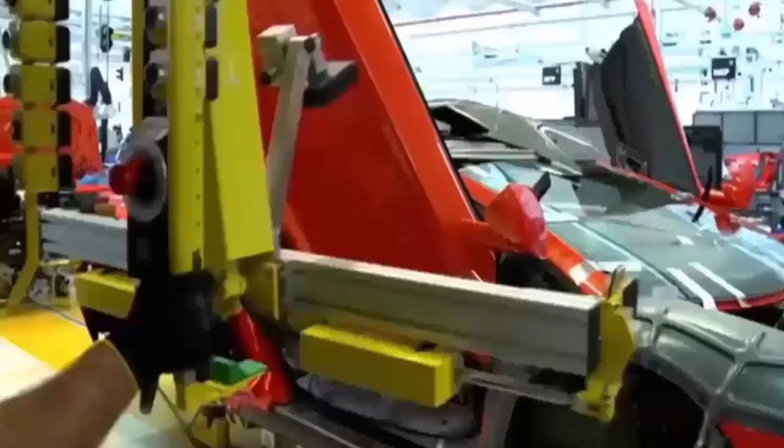But this will be no simple reworking of Lamborghini's old flagship models. Its engineers and designers are given the task of starting with a completely clean slate. And at its mega factory in northern Italy, the Lamborghini team has been stretched to its limits to fulfill those expectations. Now, as its latest creation takes to the road, it will be seen if the high-risk strategy has paid off.

Lamborghini has been responsible for some of the world's most iconic sports cars of the past half-century. 350 GT, Miura, Countach, Diablo. The brand has achieved global recognition for its no-holds-barred approach to automotive engineering. Its extreme and powerful machines have placed it among the supercar manufacturing elite for decades. But there's no room for complacency in this increasingly crowded marketplace. And a decade since the launch of their last flagship model, the Murciélago, it's time for Lamborghini to flex its muscles once again.

It's up to Stephan Winkelmann, the company's CEO, to come up with a bold approach. One of the toughest things was to give the right briefing. And it took us weeks and months. And once I went home and I was thinking about it, it's so easy, and it's just down to 2 words: no competitors. 4 years of intense development follow, conducted in fiercely secretive conditions. Our factory was as closed as Fort Knox. We had to prevent anybody from coming in and taking any picture to avoid leakages.

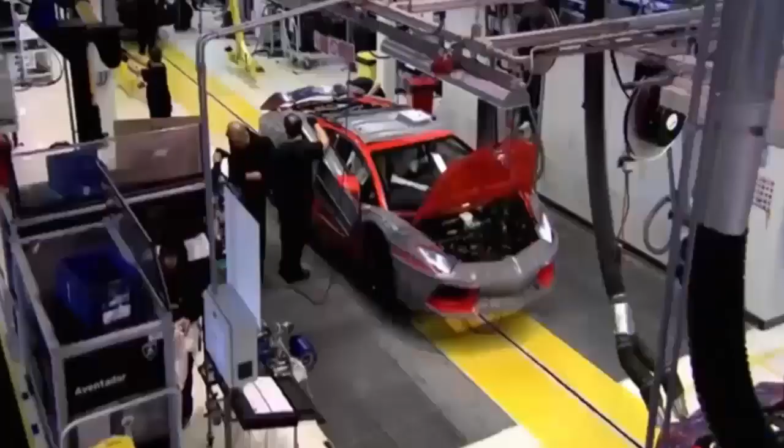This is Sant'Agata Bolognese, a typically picturesque town in the heart of Italy's Emilia-Romagna district. But it is in fact anything but typical, as it's home to Lamborghini, one of the world's most renowned supercar manufacturers. The factory is situated in the heart of what is known as Motor Valley in northern Italy. Sant'Agata is intrinsically linked to Lamborghini's success, according to its head of communications, Raffaello Porro. Everybody in the world recognizes our cars come from Sant'Agata Bolognese. And so our factory is a kind of temple where people come, you can say a pilgrimage, to visit where those cars come from.

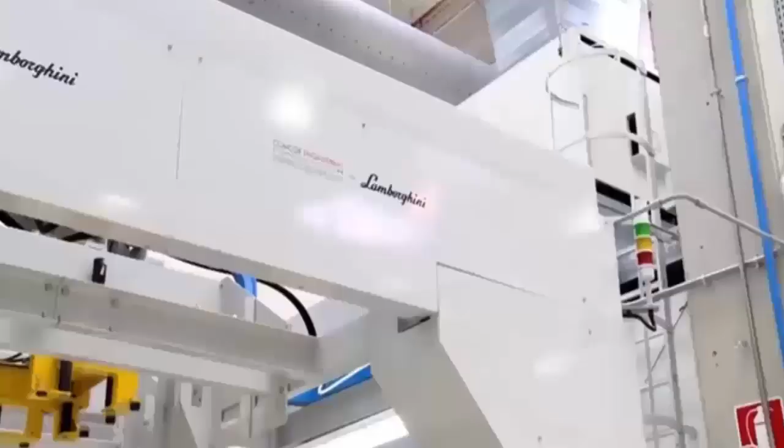The factory has seen many changes over the years, but its purpose has never wavered: to produce vehicles that challenge the status quo. And a largely local workforce is a vital part of that ethos. They're coming from this region, not even from the region, they're coming from this part of Emilia. You know, we are in Emilia-Romagna, it's the Motor Valley, and this is in Emilia. So a lot of our people are not only living here, they were born here, they are here since generations, and a lot of workers we have in our plant are here at the second generation.

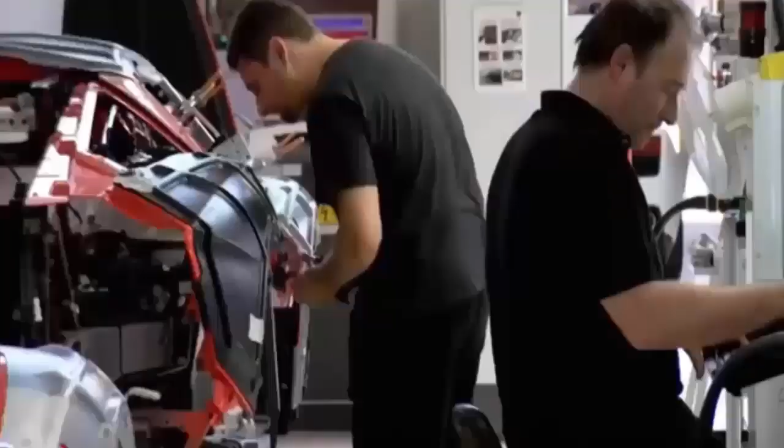These people are Lamborghini's lifeblood. Over 400 individuals working with a singular aim, to produce high-end vehicles that consistently capture the public's imagination. In the last couple of decades, a new breed of creative and high-tech vehicle specialists has emerged. Companies such as Pagani and Koenigsegg have set their sights on toppling the most revered names in supercar engineering. Names like Lamborghini.

But it's unlikely that this Italian giant will let its mantle fall without putting up a fight. An attitude embodied in the company's emblem, the Raging Bull. Partly inspired by the bravery of Spain's legendary fighting bulls, one of which showed such fearlessness in battle that it was awarded a trophy for its courage in 1993. Its name was Aventador, and almost 20 years later, its legacy lives on in Lamborghini's latest model.

It's Aventador's battling spirit that Lamborghini's development team must channel. In 2007, they're faced with the daunting task of creating a supercar that sets the standard for all others. Maurizio Reggiani, head of research and development, realizes that the only way of doing so is to take a step into the unknown.

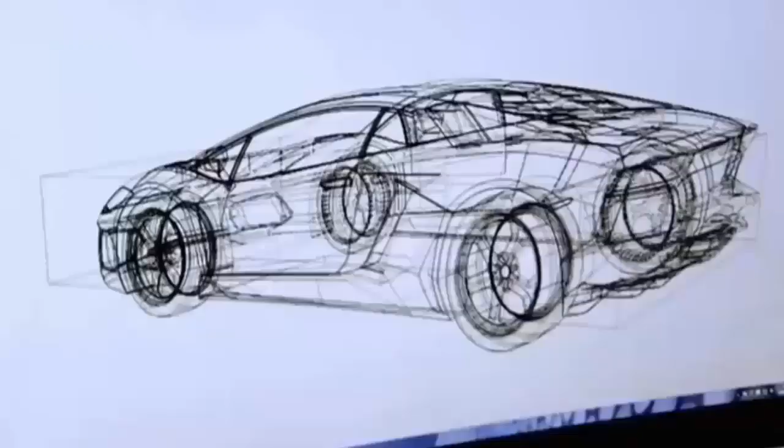We had to completely redefine the car, to start from a blank sheet of paper, and on this sheet determine, for each function, all that was needed to ensure that we'd have the best car in the world, to completely redefine what constitutes a super sports car. To start from a completely clean slate is extremely high risk, and it's up to Reggiani to convince the board that it's the right thing to do.

This was one of the hardest things. Why? Because the project we were presenting had nothing in common with the old Murciélago, not with anything that existed in production at all. So it really meant beginning from scratch, with all the risks that come with that. But the board decides the risk is worth taking. At the end of the day, they understood very well, because this is, again, about what Lamborghini is all about. Now, to recreate and to be always revolutionary in the approach.

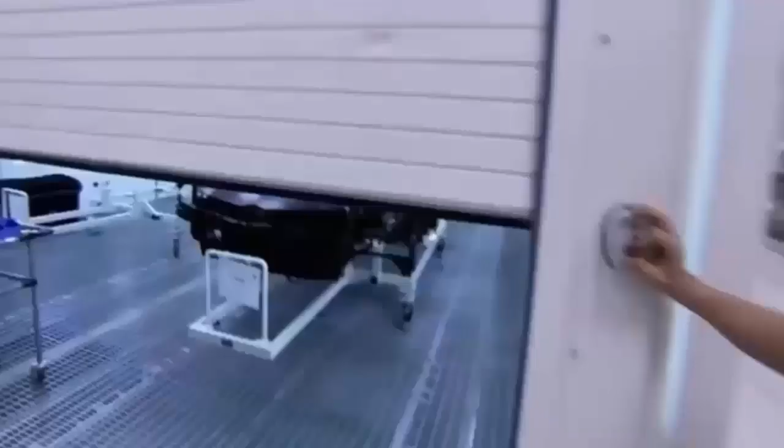The spirit of innovation is apparent in every fiber of the Aventador, as Lamborghini know that the fight to stay at the top won't be won through half measures. And nowhere is that combative approach more apparent than in their focus on lightweight construction, which they've taken to new levels with an entirely new concept for road cars: a full carbon fiber monocoque.

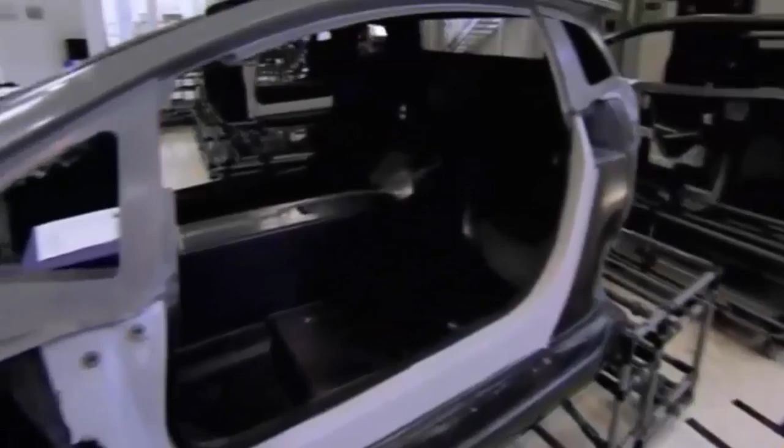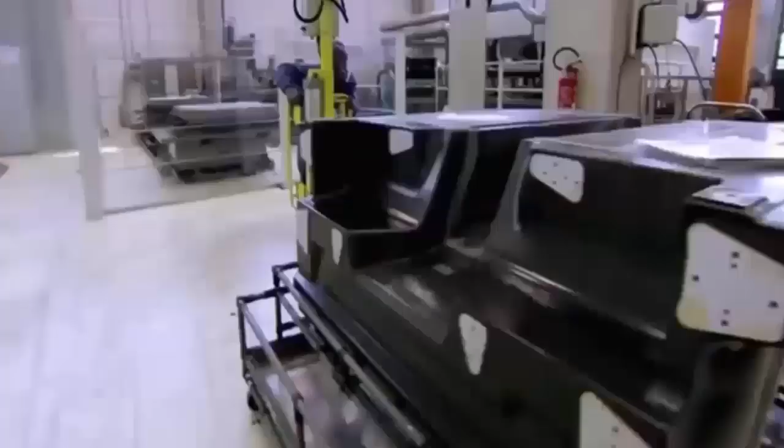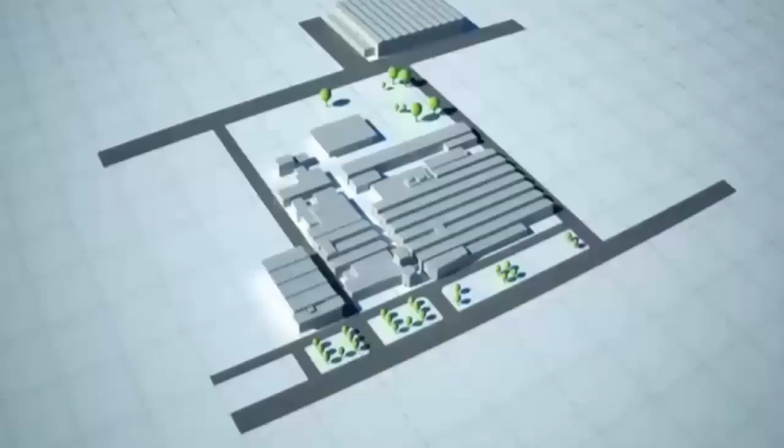These structures are common in racing cars, but the high cost of materials and laborious production methods have made them unavailable to supercar manufacturers, who've had to combine carbon fiber with cheaper, heavier elements, such as aluminium. That is, until now. The development team has devised a method that allows this race car technology to be mass-produced. But it requires a specialist facility that's up to the task. So in 2009, they build a whole new mega factory just down the road from the company headquarters, devoted to constructing the Aventador's unique carbon fiber body.

Which, being just 147.5 kilograms, helps make the Aventador significantly lighter than the Murciélago, considerably improving the all-important power-to-weight ratio, and in turn, the handling. Lamborghini hopes that this innovation will stave off the threat by the new wave of rival companies. Lamborghini knows well what it's like to be the cocky young upstart, vying to unsettle the established names, as that's how it began almost 50 years ago.

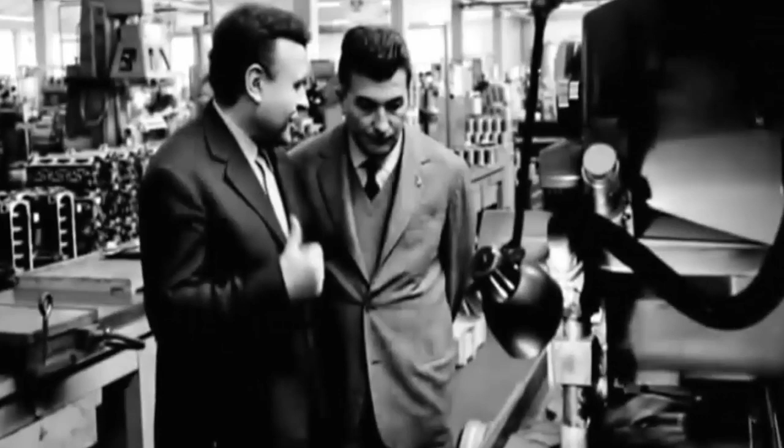The man upsetting the status quo back then was the company's founder, Ferruccio Lamborghini. He had made a fortune from a tractor manufacturing business and used some of his money to satisfy his love of sports cars. According to Lamborghini legend, when he went to Ferrari to critique some of their parts, his views were dismissed. He got a negative response out of some requests he had and proposals to make a better car. And so he said, I will found my own company and I will create the best super sports cars ever.

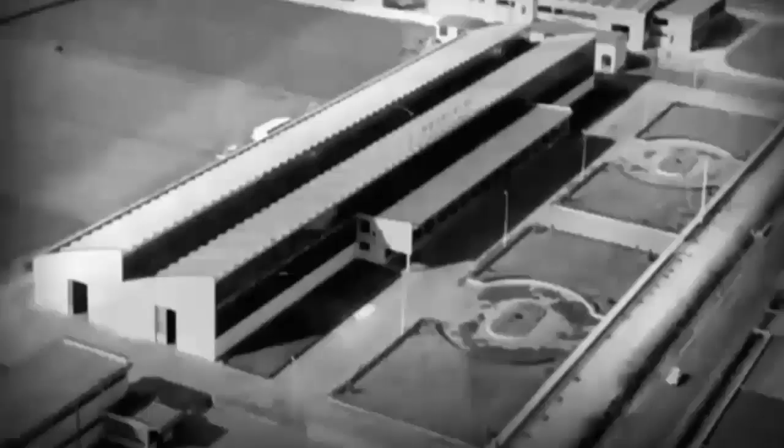He established Automobili Lamborghini in 1963, and for the next few years he toiled furiously to achieve his goal. The cars he created were well received, but it wasn't until the launch of the iconic Miura in 1966 that Lamborghini really made its mark. The tractor maker had succeeded in breaking into the exclusive world of supercars with his bold new enterprise. Almost 50 years later, despite having joined the ranks of well-established sports car manufacturers, the company still strives to be edgy and uncompromising.

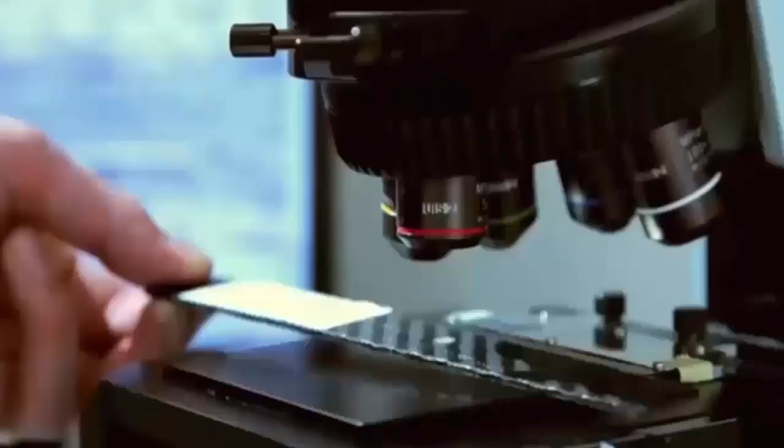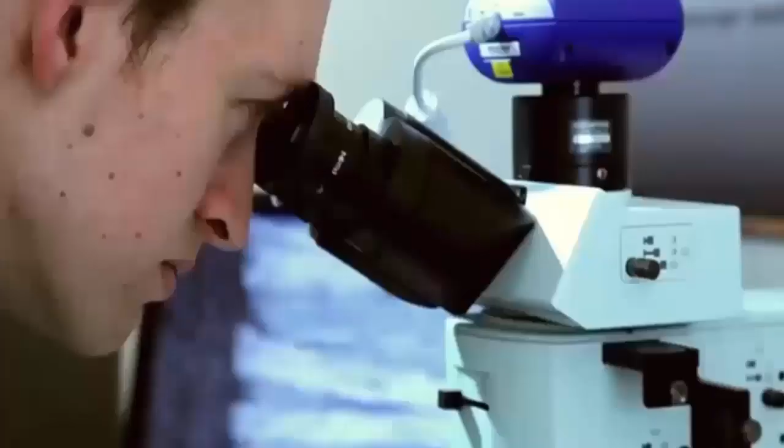As demonstrated by its approach to the area it believes will define the future of sports car engineering: lightweight carbon fiber construction. The company's relationship with carbon fiber goes back as early as the 1980s, when it created the Countach Evoluzione, a concept car which experimented with the use of composite materials. It was dreamt up by the newly formed Composites Department, whose successor has made many inroads into research and development of lightweight composite materials. And discoveries made here mean that next door, the company has been able to construct its new carbon fiber production facility.

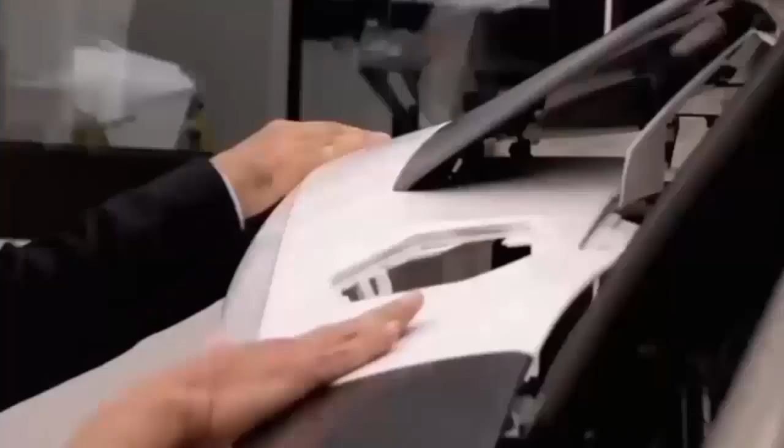The man given this task in 2009 is Ranieri Niccoli, Industrial Director. And he must devise it completely from scratch. So, when we design and we build this factory, we didn't have any automotive benchmark. We were the only one in the automotive business to build and to run this kind of technology.

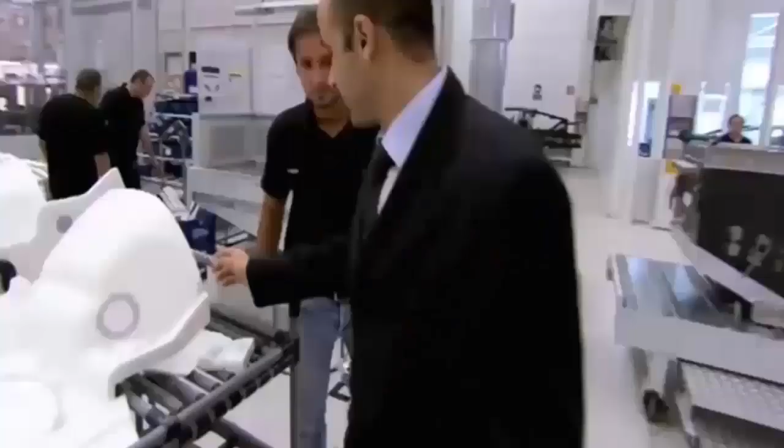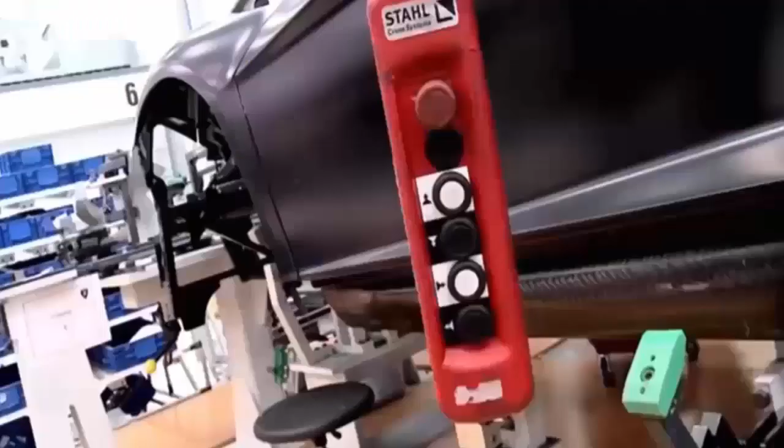So they have to look elsewhere for inspiration. So we look to other sectors, for example, the aeronautics sector. Then we adapt and we modify their process to a Lamborghini production system in order to build our car. The result is 500 square meters of new production space, known as the CFK, devoted entirely to sculpting the Aventador's super lightweight monocoque.

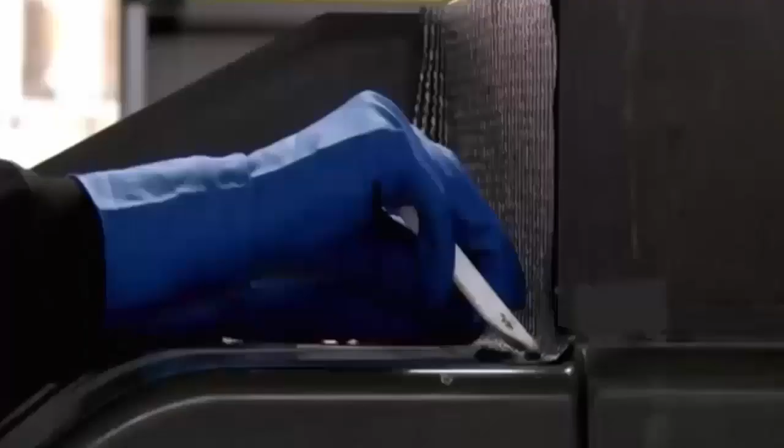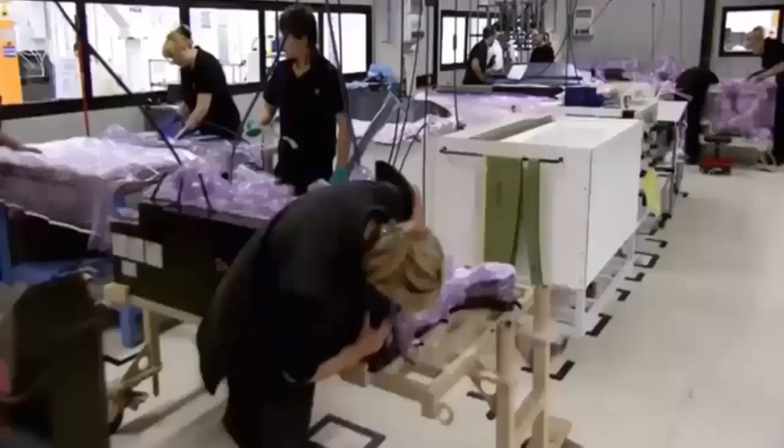Here, 146 carbon fiber specialists toil day and night to create 4 complete monocoques every 24 hours. To achieve this target, engineers have developed a unique production system. All materials are first cut by an automated machine before being sent for preparation. The material is placed into molds and laminated in a vacuum bagging process which forces the layers into shape before being cured in a large pressurized oven known as an autoclave.

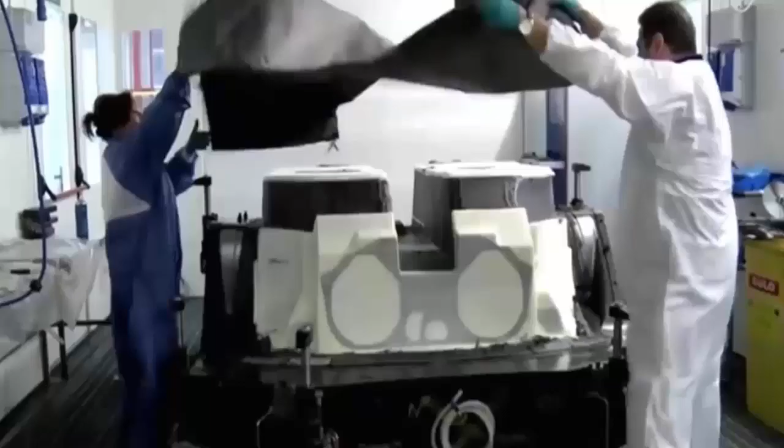Meanwhile, the production of other parts of the monocoque is underway, as operators fine-tune and cut more layers of carbon fiber with the assistance of precision lasers. A special oven is used to inject resin into the carbon fiber mats, which transforms them from soft sheets of cloth-like material to a strong, rigid structure. After all these processes are over, the two key sections are finally recognizable: the base section, known as the tub, and the roof.

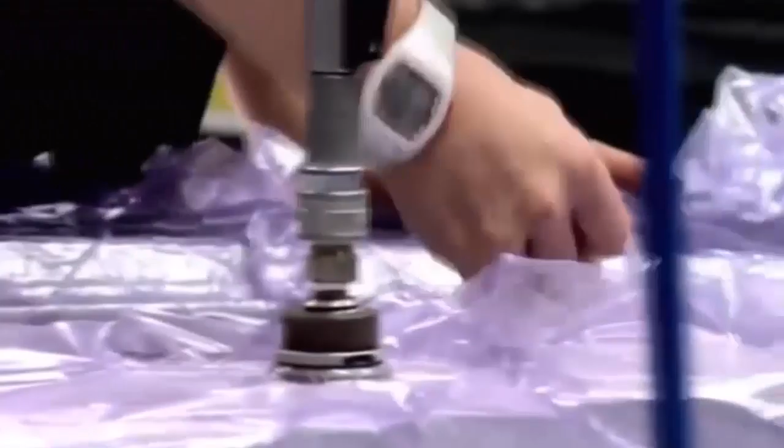They're placed in an automated machine, which drills them with holes allowing for attachments to be made later. Throughout the factory, computer-controlled machines share tasks with human specialists, a partnership that's integral to the Lamborghini production process. The main priority of our plant was to follow the Lamborghini production system. So, with a high degree of craftsmanship, high degree of skill, people, combined with technology, with automation processes. This was the main challenge that you can also see in our plant.

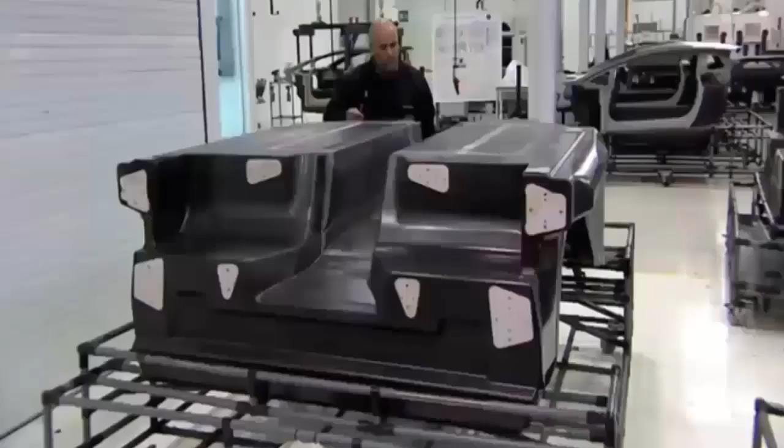Aeronautic-inspired engineering is ingrained in many aspects of the Lamborghini CFK production process, such as this stage, known as the Harmony Hammer Test. In this quality control test, an operator strikes the monocoque section with a specially designed hammer and allows it to vibrate, listening out for areas where air might be trapped in the carbon fiber shell. Once checked, the parts are ready for their union as the tub and roof are glued together, turning the monocoque into a single entity.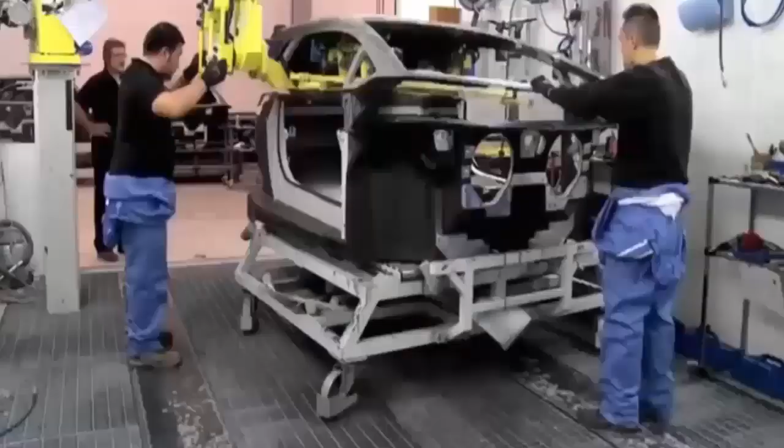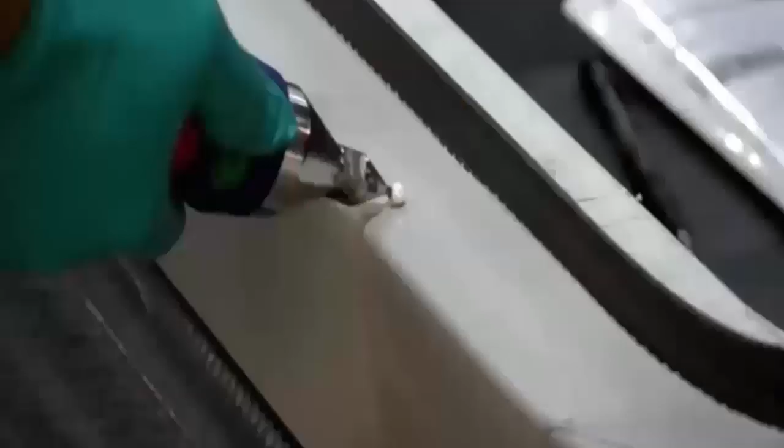It's essential that the two parts of the monocoque are exactly aligned. So workers use a robotic arm with a 3D laser attachment to check that the sections have been coupled correctly. Once the correct dimensions are confirmed, metal sections are manually attached to the monocoque and the body is complete. Then it's into a light tunnel where surfaces are quality checked to ensure they're in pristine condition before the Aventador's body is signed off for release.

As the body is ready to leave the carbon fiber plant, it's possible for the first time to see the Aventador's unique geometry taking shape. This extreme design is one of the most recognizable aspects of the Lamborghini DNA. And it's a tradition maintained and pushed forward here, at Lamborghini's design center, or Centro Stile. The generational leap required of the Aventador does not stop with its engineering capabilities. The look of the car is integral to its ambition.

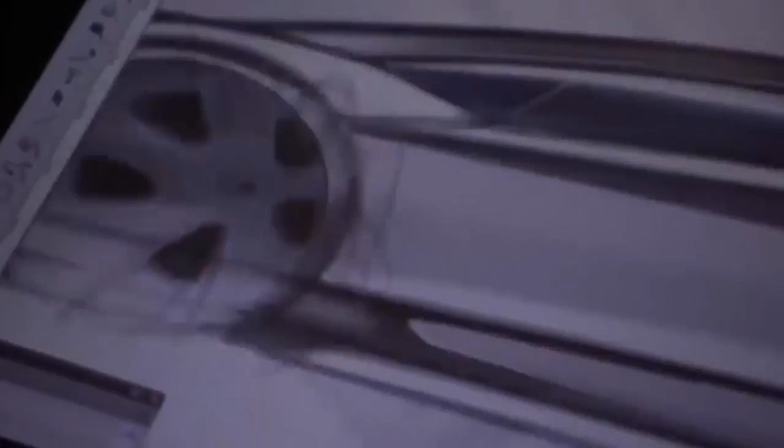The design of Lamborghini always has to be revolutionary. Yes, you have to understand, if you see a car in front of you, this can only be a Lamborghini even if you don't know the model. So it's very tough for our designers because they have to create something new, but recognizable at the same time.

The job of the design team and its chief, Filippo Perini, is made even tougher during the earliest phase of the Aventador's development, when the board forces them to compete with outside companies to earn the right to design the new model. And at one point, victory comes close to slipping through their fingers.

The hardest moment was when, during the process, we realized that we were at risk of losing the project altogether. This was a critical point in the process when we realized that we had to be more innovative, more unconventional, more extreme, unexpected, and uncompromised. It's tough going, but the competitive spirit has a positive effect on the team, and their proposal wins the day.

What results is a design imbued with a deep understanding of the company's past. Our design is driven by the history that we have, is translated into the desire to always do something innovative, to create a different object interpreted in the most futuristic way possible. This is part of the Lamborghini history.

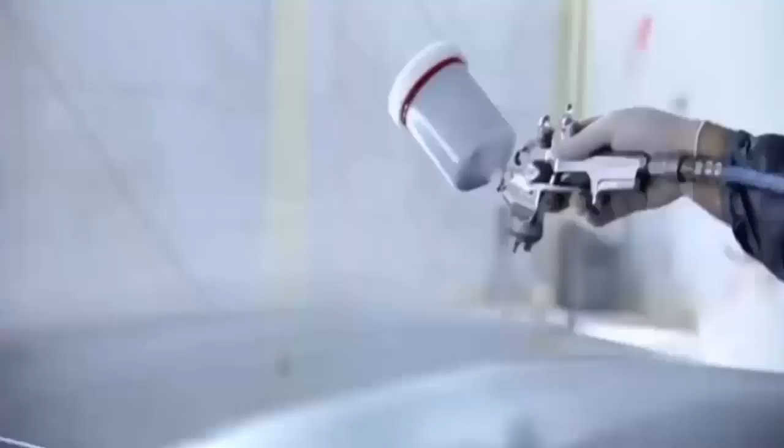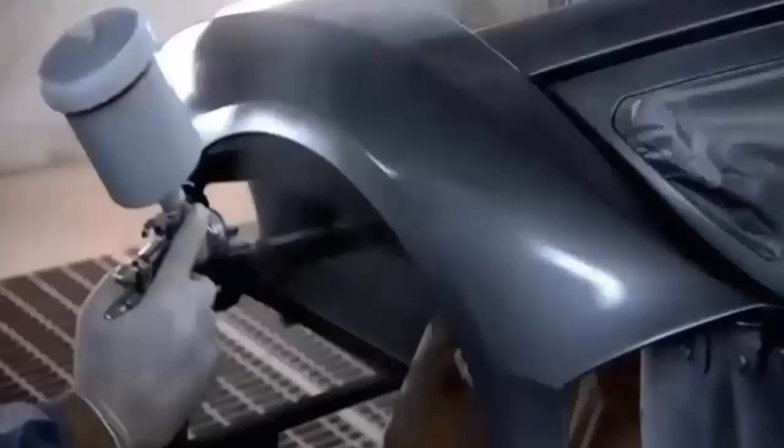Before Perini's vision can be realized, however, the Aventador's body still has some way to go. After the CFK, it's taken away to be given one of its most important characteristics: its color. Here at the paint shop, it's lavished with the kind of attention that most cars could only dream of. One of 13 colors is hand-sprayed over every part of the bodywork. 27 pieces are given individual attention by a specialist, who covers them with 8 liters of paint.

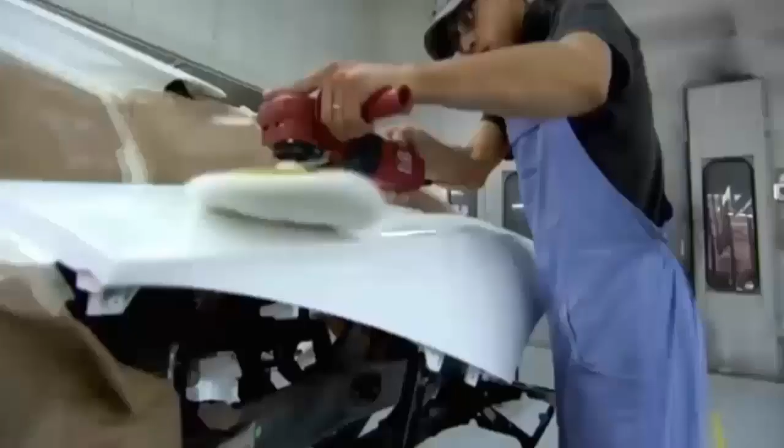The Aventador, with its extreme lines, requires more man-hours than any other Lamborghini in the past. And of course, every phase is carried out manually, as only human analysis and dexterity can ensure that each surface is covered with exactly the right amount of paint. In total, 200 man-hours are spent on every single Aventador while at the paint shop. 3 whole days are spent on polishing alone. After being carefully sanded, the Aventador is repeatedly buffed with special materials.

After that, it's sent for another quality check in a light tunnel. For 2 hours, an inspector walks around the bodywork, checking for colour perfection. If there's any inconsistency, the offending section will be sent back to be repainted. Under-polished areas are also marked out for extra attention.

These hundreds of hours of devotion end when the exacting standards of the inspector are met, and the car is released for the next phase of production, the assembly line. The assembly line for the Aventador lies just meters from the original site of the Lamborghini factory, built almost half a century ago.

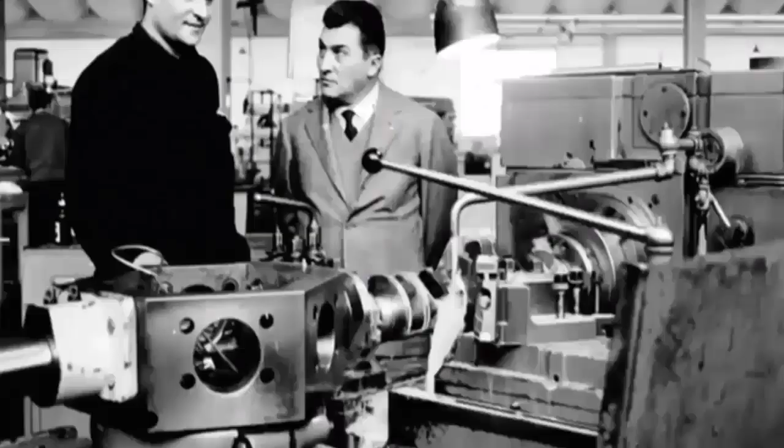Back then, its founder, Ferruccio Lamborghini, was known for his hands-on approach, frequently seen on the factory floor, directing operations. He focused on the skill of the mechanic as being key to the success of the product, and that attitude still permeates the site today.

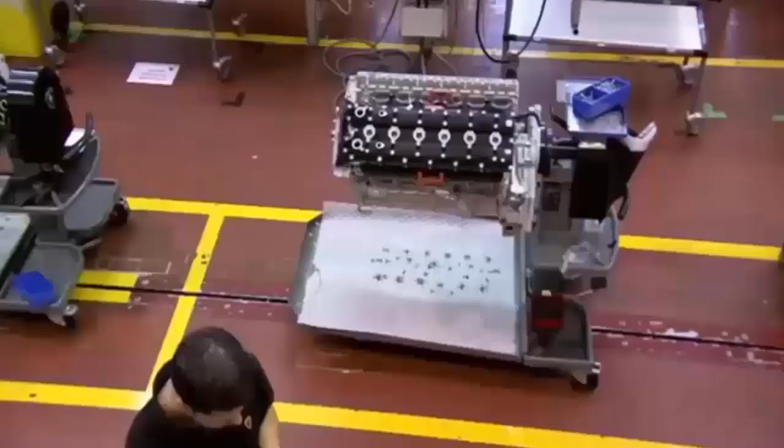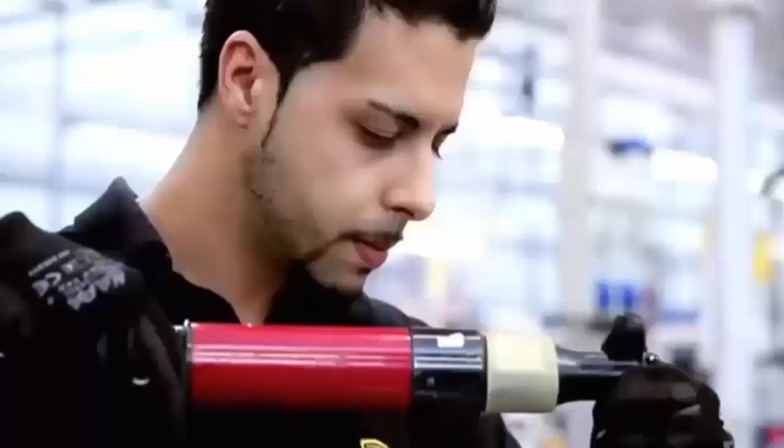Here, 50 workers spread over 11 workstations are responsible for the task of assembling Lamborghini's latest model. The man in charge of making sure things run smoothly is production manager Andrea Costantini. He sees his highly trained workforce as a direct link with the roots of the company.

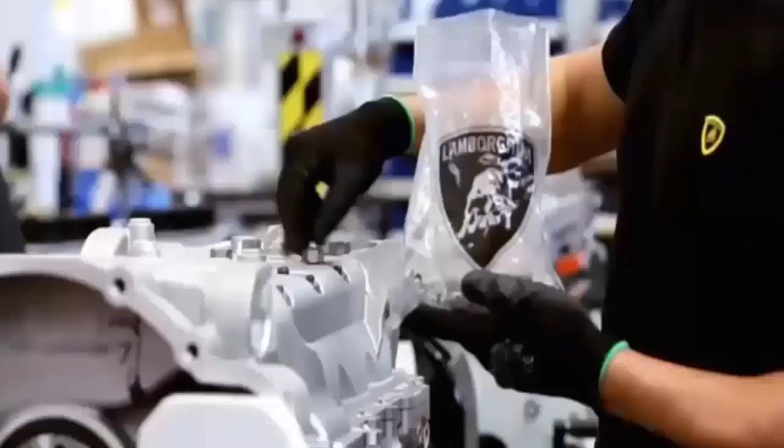In this case, the workers are the most trained. We take these guys directly from the best schools of mechanics of Emilia-Romagna here, the surroundings of Lamborghini, and we train them for more than 2 years to allow them to be really the best experts on mechanics and engines. So everything is done manually, still like we did since 1963, since when Mr. Ferruccio Lamborghini, the owner of Lamborghini, started.

In an age when machines dominate production in almost every field of manufacturing, loyalty to the art of skilled manual labor is not often seen. But here it's believed that when it comes to reliability and precision, humans still have the edge over machines. And nowhere more so than in the engine assembly station. For this is where the heart of the Aventador is put together, the Lamborghini V12.

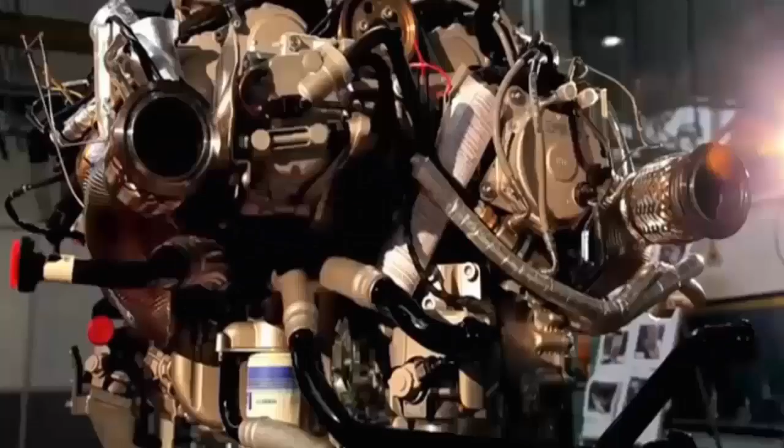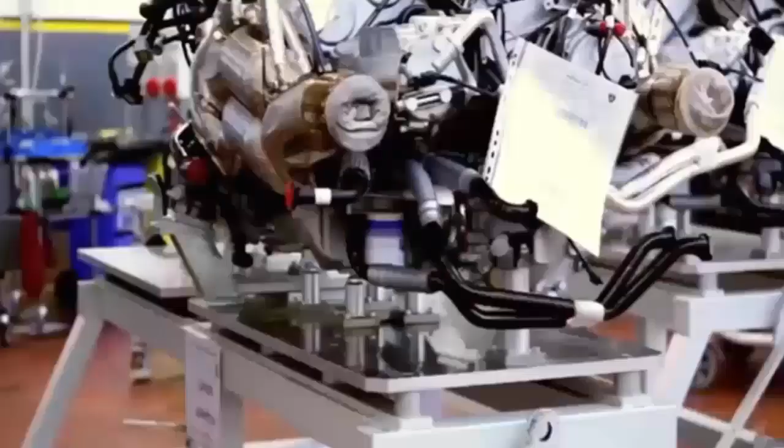At a time when many sports car manufacturers are shying away from using the 12-cylinder engine, Lamborghini is resolute. The V12 always has and always will provide the power for their flagship models. The V12 for Lamborghini is part of our DNA. Everything for us is rooted in our history, which started with the 12-cylinder engine.

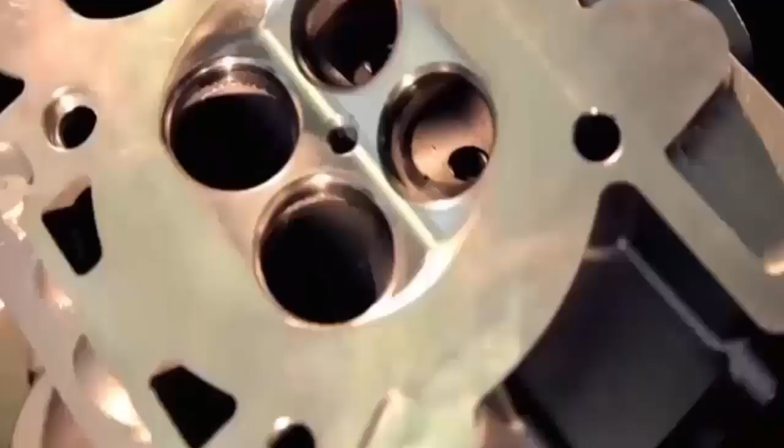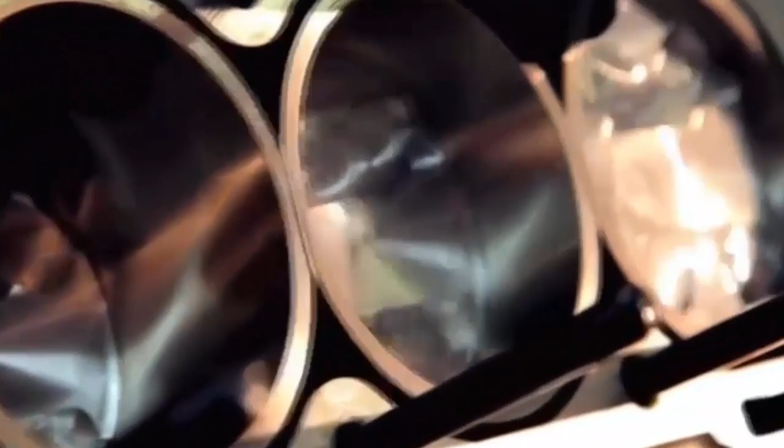With 6.5 litres of displacement and 700 horsepower, the Aventador's V12 is about as gutsy as it gets. But as with everything else, it's had to move with the times. Lightweight, again, is the order of the day. And despite the fact that this engine is more powerful than the Murciélago's, it weighs less, just 235 kilograms, by using aluminium silicon alloy on components such as the crankcase.

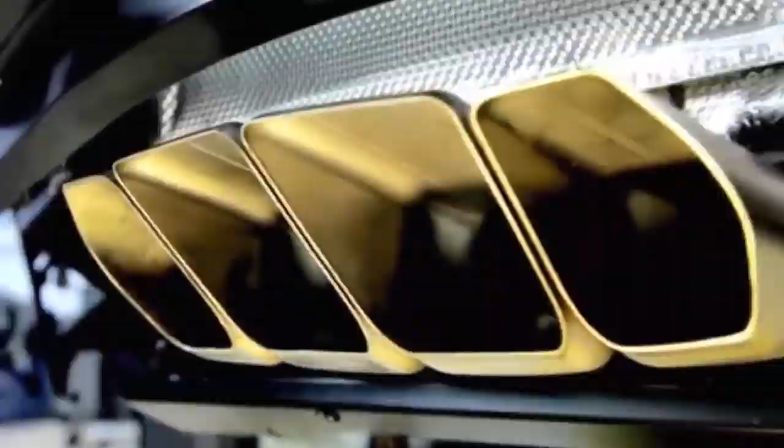The main purpose of the V12 is to power the Aventador, but when linked with the car's exhaust system, it takes on another significant role: creator of the mighty Lamborghini orchestra. The V12 motor represents what for us is the sound, the music of the car, the way in which it's presented to the public, the way she makes herself heard and announces her arrival.

To achieve this, we invest a great deal of time in simulations. We simulate the sounds that we can have, and then we experiment first in the lab and then on the vehicle itself. This 12-cylinder symphony has a full range. From a moderate rumble through the town at low revs to the screaming crescendo of maxed-out gear shifts.

While the V12 is being assembled, the body of the Aventador arrives on the assembly line, ready for conversion from an empty shell into a fully functioning supercar. As the company's latest foray in a highly competitive market, the Aventador needs a production process with efficiency to match.

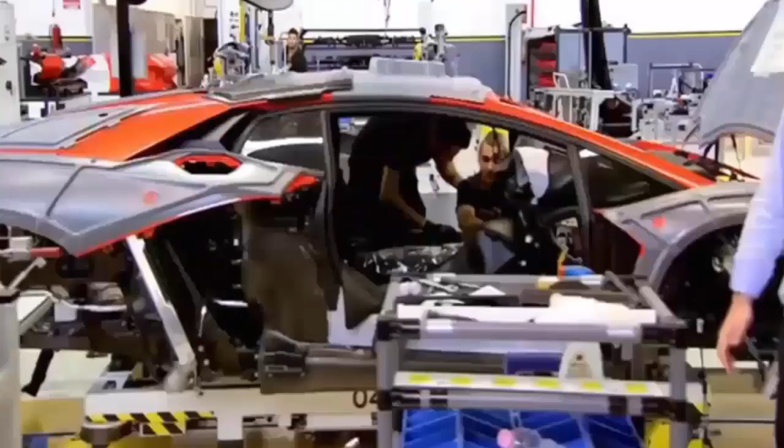The drive for improved efficiency was for sure coming from the market, from our competitors. We have always to be the best, to be the number one in terms of product, in terms of performance, but also in terms of quality. So to become and to stay the number one, we have always to have a huge increase of efficiency, a huge increase of quality in the assembly line and in all the processes inside the factory.

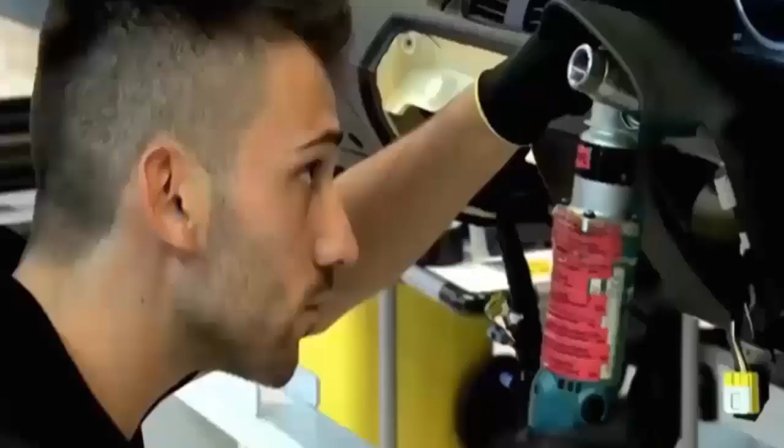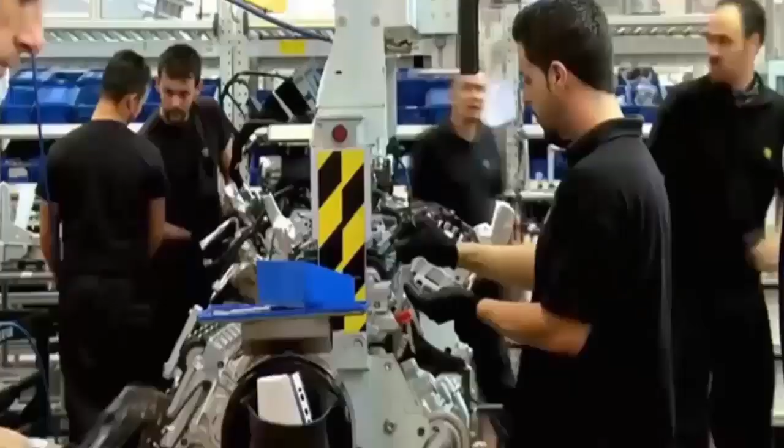The company's output of luxury vehicles is a mere fraction of what the large-scale manufacturers produce for the mass market, with around 800 Aventadors due to be created in the first year. But that doesn't mean the factory can't be run to similarly exacting standards of efficiency as the largest groups. And that means that workers have just 1 hour and 40 minutes to carry out a whole range of highly meticulous tasks. If they take too long, the whole assembly line will stall, targets will be missed, and costs will mount up.

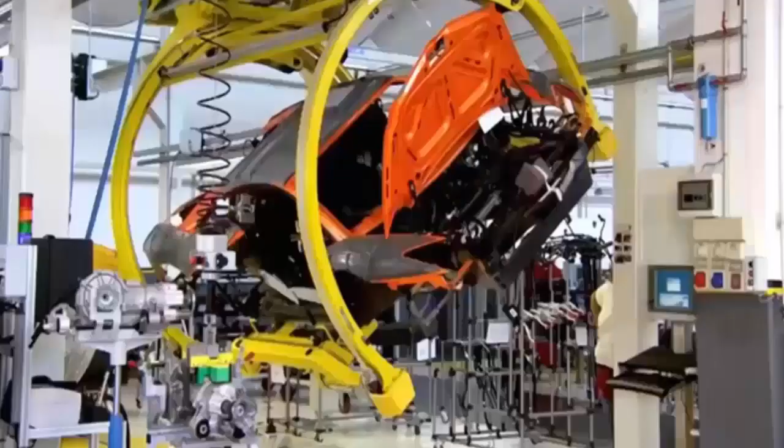The countdown starts here at the first station. Work is carried out on the underbody and front differential by lifting and rotating the vehicle to give the mechanics easy access, before being readied for what is arguably the most significant stage in the Aventador's production, the insertion of the colossal V12 powertrain into the car's chassis.

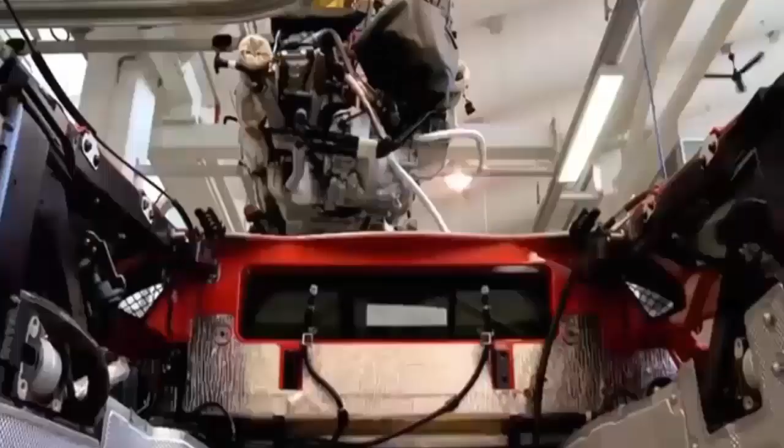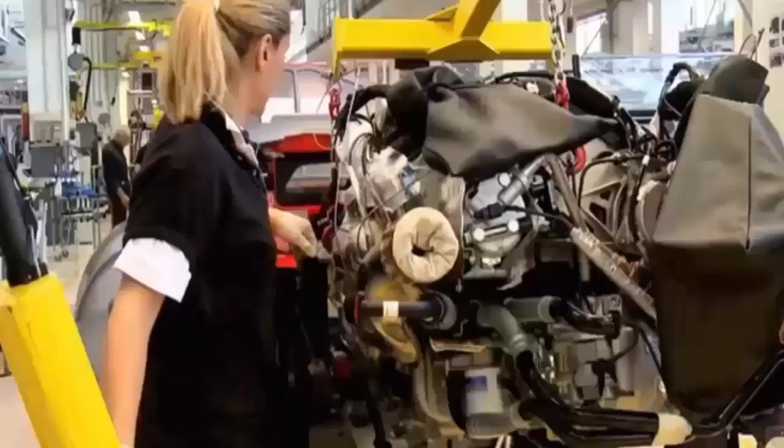Here we are in the most critical assembly station of the Aventador assembly line. Here we have the assembly of the engine, the heart of the car, basically inside the body in white. We call it the marriage between the car and engine. This marriage of elements is when the development team's work of the past 4 years comes together, where design and engineering combine.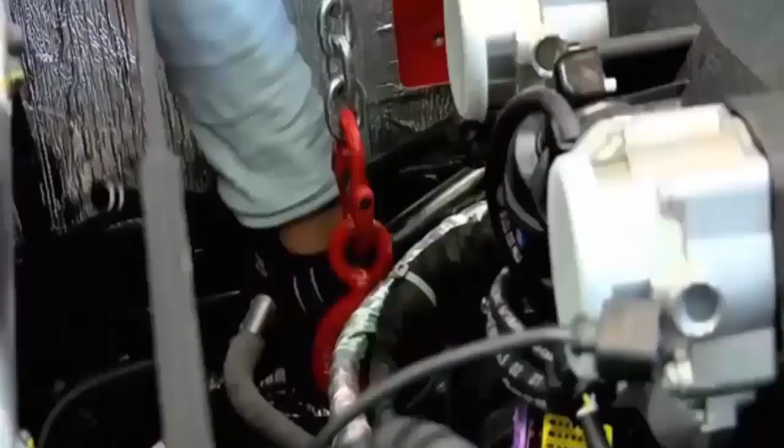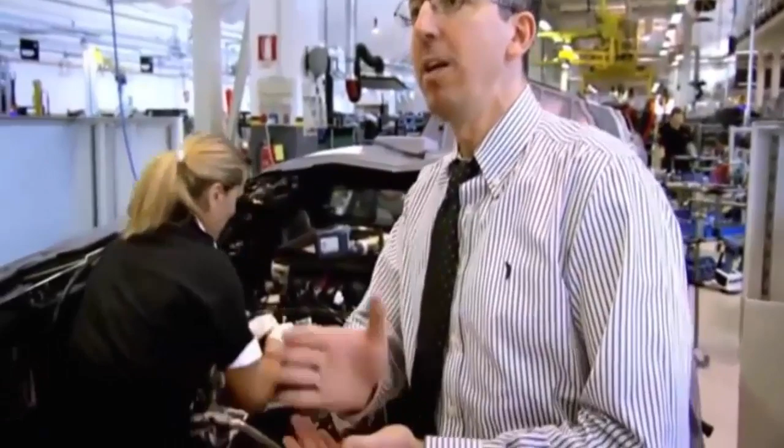Here, as with all other phases of production, the specialists of each station take full responsibility for their section. You can see the workers check each and every single connection to be sure that each and every phase was done in a good way. The risk in this case is the car is not working properly afterward during the road test, and could be a big problem for a customer. As you can see, this is absolutely not done with equipment, a robot, or other automatics, but is done manually.

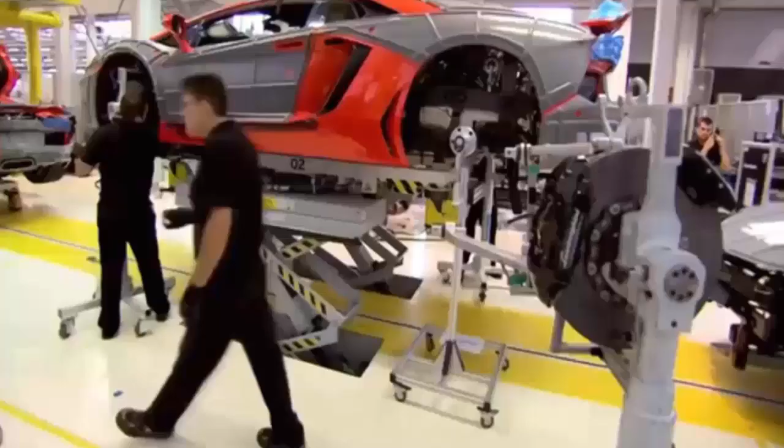Step by step, the car is taking shape, being molded from empty shell into the fully formed supercar that will leave the factory. And while the assembly line is in full flow, next door, the second critical aspect of the Aventador is being prepared: the interior. It's in this sector of the factory that a customer's individual preferences for the way their car looks can really be indulged.

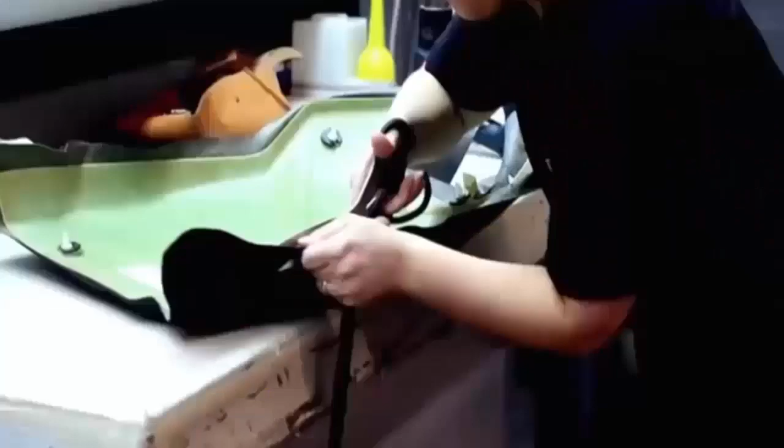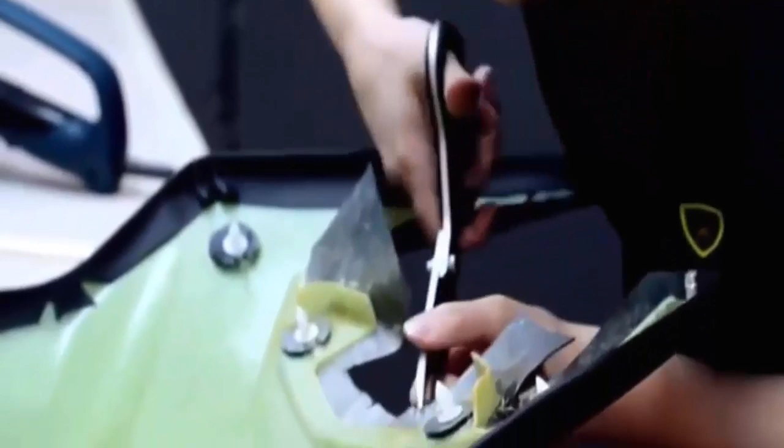About 100 square meters of leather hide in 9 different colors arrives each day. Attention to detail is essential to pass the stringent quality control checks. Here, a leather specialist looks for minor imperfections in the hides and marks them up wherever found. An automated machine recognizes the marks and cuts around imperfections, leaving only pristine material for the Aventador's interior. The leather is then taken to specialists with 3 years training to be stitched and glued onto the various parts that make up the Aventador's interior.

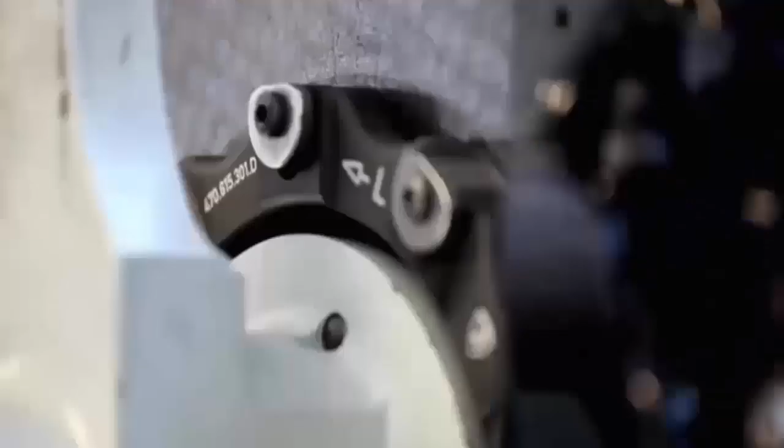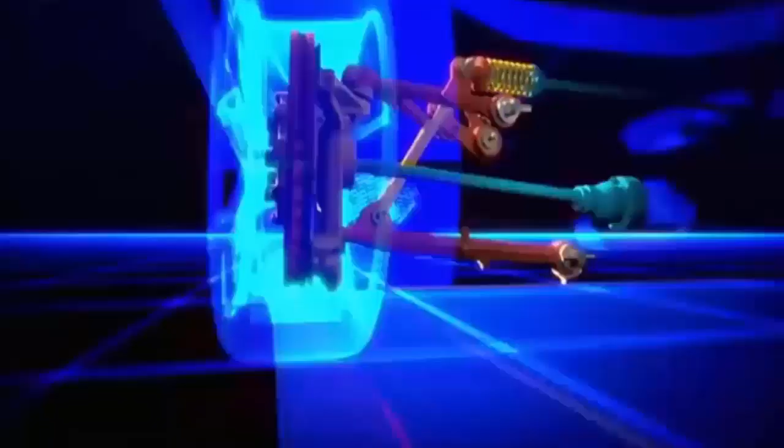Back on the assembly line, one of the Aventador's most important pieces of kit is ready. This simple-looking item is the suspension, but its apparent simplicity belies the creativity that goes into its engineering. The Aventador uses a pushrod suspension system direct from the world of Formula One race cars. It works by keeping wheel control and damper elements separate. By keeping the damper elements inboard, the pushrod system allows the wheels to maintain maximum contact with the road when going round bends, massively improving the handling on corners, a must for a car that can hit speeds of up to 350 kilometers per hour.

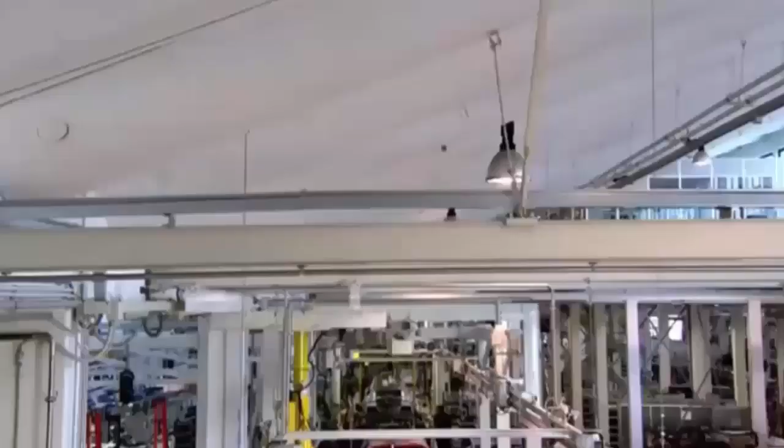Such technological innovations are only made possible by extensive testing of the vehicle during the development phase. And possibly the most critical moment for the engineers is when the prototype model takes to the track to be put through its paces for the first time. For the Aventador, this happened back in 2008.

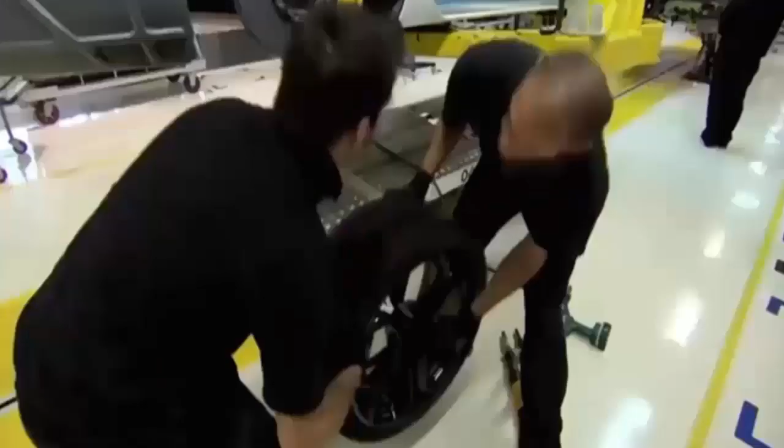The Aventador is reaching the final stages of the assembly line, and mechanics work quickly to get it ready for the next phase of production. Here we are in the last workstation of the Aventador assembly line. After 4 days of assembly, over 50 workers in the line and more than 60 in the saddlery and the engine have assembled our cars.

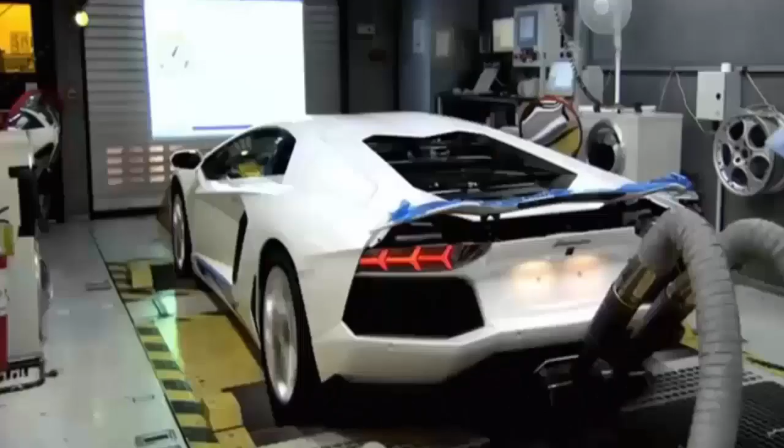As important as the assembly process itself is the series of quality control checks that the car must undergo once it's complete. Any minor imperfection could impact on the car's performance, and its safety elements in particular must be rigorously tested. The brakes are checked in a room where the car is driven at speeds of up to 140 kilometers an hour on a rolling road.

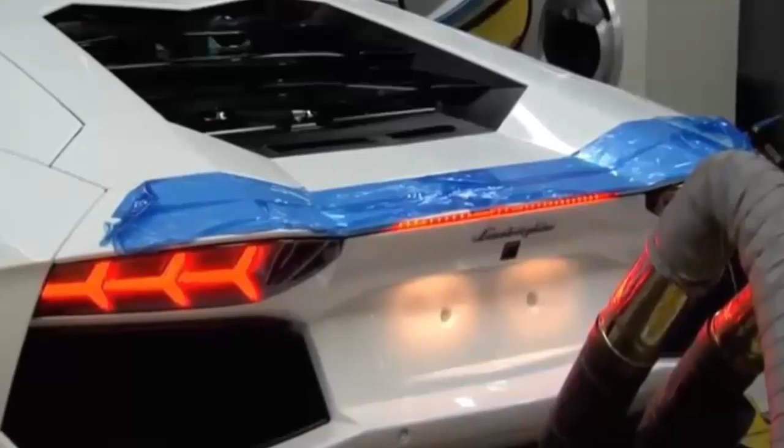The final task of the factory workers is to scrutinize the car in a light tunnel to ensure that aesthetic standards haven't been affected during the assembly process. But before it can be shipped to whichever global location it's destined for, each Aventador must undergo one final phase: the all-important road test.

Every car is given its own test drive around the local area. They're put through their paces to check that their complex engineering is absolutely in tune. And it's here for the first time that the cars are enjoyed as they were intended to be. Only once the test driver is satisfied that all aspects of the Aventador have been properly configured will he sign it off for release to the outside world.

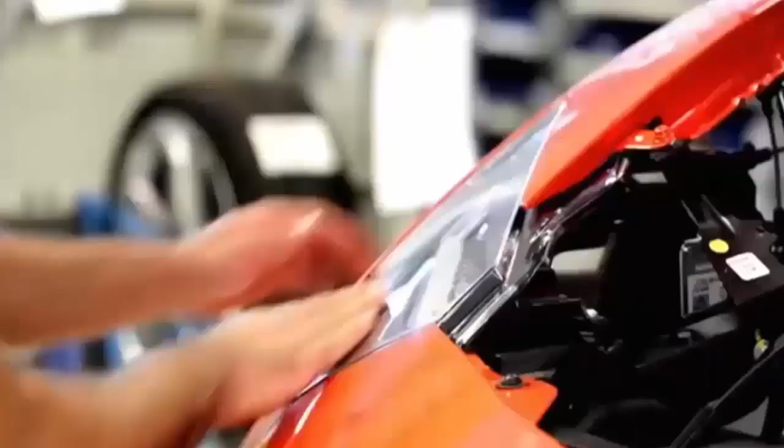The Aventador has come a long way since the brief was first given for its creation in 2007. Years of struggle from designers, engineers and mechanics have culminated in a vehicle which looks likely to remain as Lamborghini's flagship model for some time to come. The risk of starting completely from scratch has paid off. And with the new era underway, complete examples of the Aventador are rolling off the assembly line at a rate of 20 each week.

But for Lamborghini, the challenge does not end here. As the company celebrates its 50th anniversary in 2013, it will be thinking of new ways in which it can push the boundaries of automotive engineering. Stephan Winkelmann suggests that a different era might be around the corner.

Our two-model strategy for the future will not be enough, so we decided to step into a third model. It will be a Lamborghini which you can drive every day, so a very usable Lamborghini, but it will always have the DNA of the true Lamborghinis inside.

A Lamborghini for everyday use may be on its way. But until then, the Italian supercar manufacturer will focus all its efforts on producing vehicles which aim to keep them ahead of the competition. And right now, the car leading that charge is the Aventador.